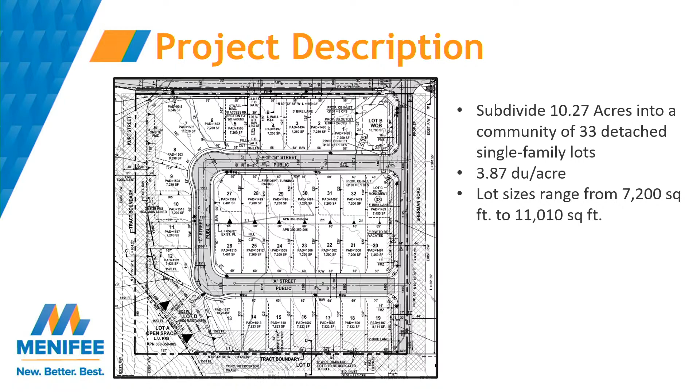The general plan for these two properties are 2.1 to 5 residential dwelling units per acre and rural residential 5-acre minimum. The rural residential zoned area is designated to the lower left-hand corner of the project site.

For the zoning, it is low density residential-2, which is a minimum 7,200 square foot lots, and rural residential 5-acre minimum. To the north, we have similarly zoned LDR2 zoned properties. To the west and south, we have a mixture of LDR2 and rural residential 5-acre minimum. And then to the east, we have EDC zone, economic development corridor.

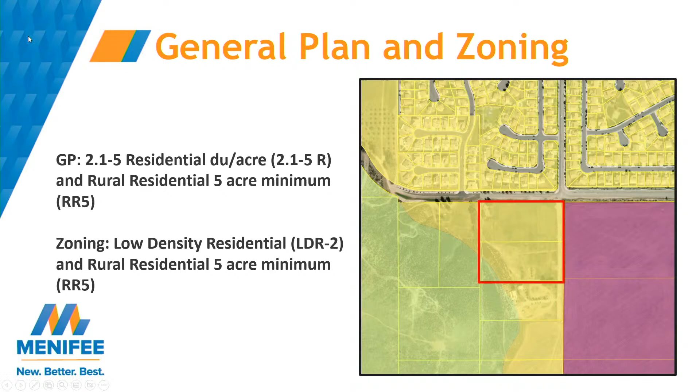Access to the site will be given from Sherman Road on the east side of the project. There'll be 2 entrances and exits for full access. And then due to fire and city requirements for secondary access, there will be an emergency only access corridor between lots 4 and 5 on the north side of the project for access to Garbani Road.

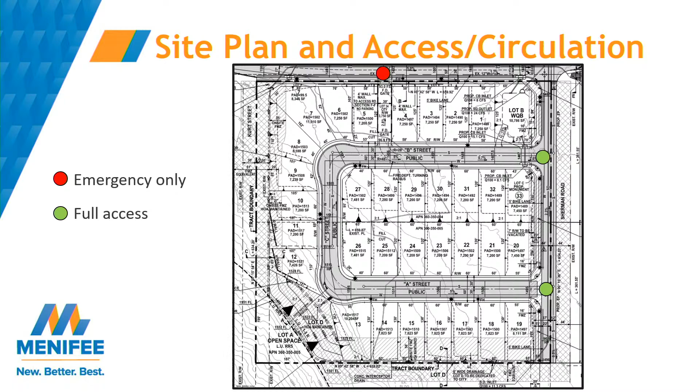The tract is within a high fire area, which requires a fuel modification report to be completed. This report dictated that the tract has to go through upgraded construction materials, restrictions on types of plant materials and locations on the properties, rear yard HOA maintained irrigation, and a block wall around the perimeter of the project. Total, there'll be over 90,000 square feet of landscaping.

An initial study mitigated negative declaration was prepared with a public review period from June 15th through July 5th, and no public comments have been received.

The recommendation is to adopt a resolution adopting the initial study and mitigated negative declaration and mitigation monitoring and reporting program, and adopt a resolution approving PLN 21-0361, tentative tract map number 37450, subject to the conditions of approval and findings in the staff reports and resolutions. And that concludes staff's presentation.

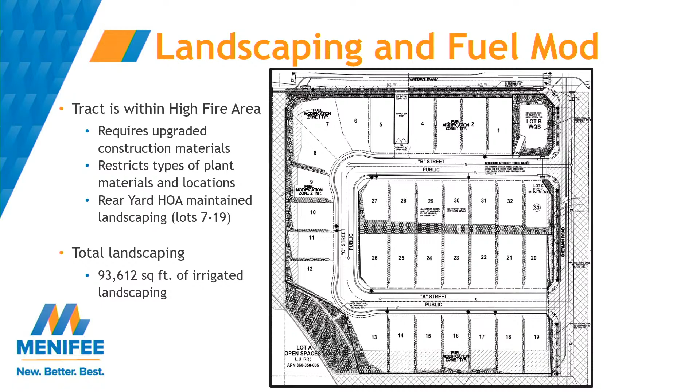Is this open space accessible to the public from outside as well as inside? It is not. It's mainly there to preserve the rural nature of that corner of the property and assist with fuel modification requirements. It's on a slope, so it will only have access to the homeowners association for maintenance. I believe it's going to be landscaped, right? A portion will be irrigated landscaping, and the lower left-hand corner will be natural open space. With two rows of shade trees, is that correct? There will be some trees in there, two rows, yes. Thank you.

Okay, we're going to open up the public hearing. It is 6:07. Madam Clerk, was this hearing legally noticed? Yes, it was. And was any correspondence received? The correspondence received was referenced in the presentation. I think the presentation said there wasn't any correspondence. Right, okay, thank you. Do we have the applicant here?

Yes. Can you join us at the podium and state your name, please? Hi, Jordan Birch on behalf of the applicant. Jordan. Let's see.

First things first, do you agree to all of the conditions of approval that you've discussed with staff? I do, and I'd also like to thank staff. I think they were great working on this project, and I just commend them. I think you guys have a great team here. I agree. Thank you for doing that. Thank you for saying that. Commissioners, do we have questions of the applicant?

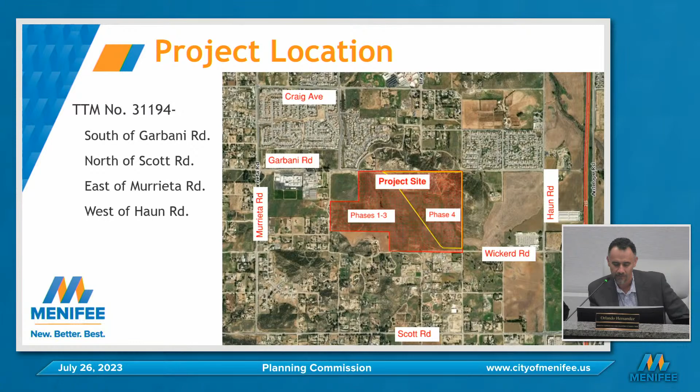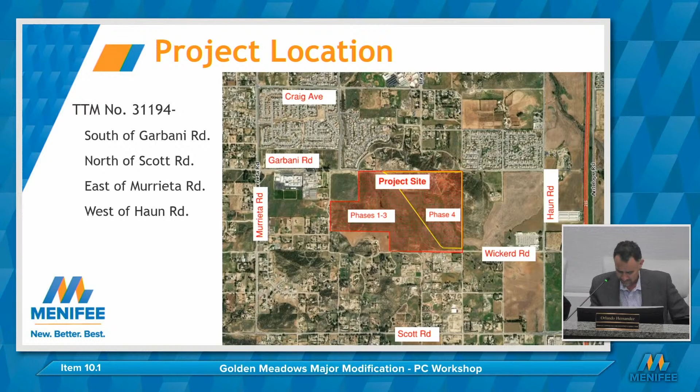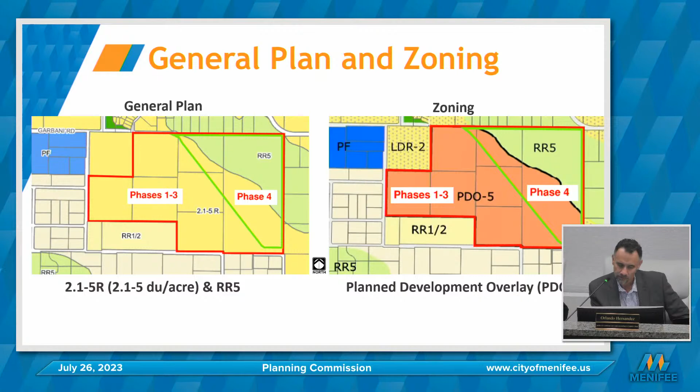Again, for the benefit of the residents and the people watching on YouTube who may not know the project, it's located south of Garbani, on the west side of Haun, east of Murrieta. You can see it's on Wickerd, north of Scott. The existing general plan designation is 2.1 to 5 units to the acre. There's a portion of the site, as you can see on the right, north side of the image—it's RR5, a rural designation, and that area is still proposed to remain open space.

So that hasn't changed. The footprint hasn't changed either. The zoning, as you see it here on the slide, it's PDO-5. That's a very unique type of zoning, and what this is, it was a density that the city did not have, and in order to apply a specific zoning for that development, the city created this specific zoning for it.

I do want to state for the record that the original project, when it went before the county, this area was zoned rural, with agricultural zoning, and it had a minimum designation of lot size of either 1 acre, 5 acre, or 10 acres, because it covers a big area. When that zone change took place at the county, it was zoned to more traditional single-family residential, but for us, we had to change it to comply with what we had in our general plan.

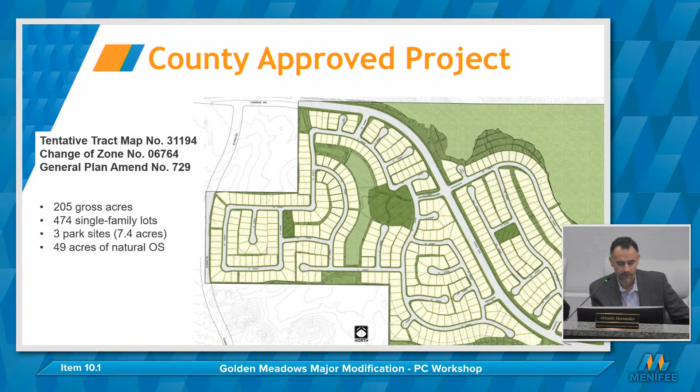So this is essentially what the county approved back in 2007. Again, 205 acres, total number of units, 474. There are 3 different park sites throughout the development that equal a little over 7 acres. And the open space acreage is 49 acres. It will remain the same as well.

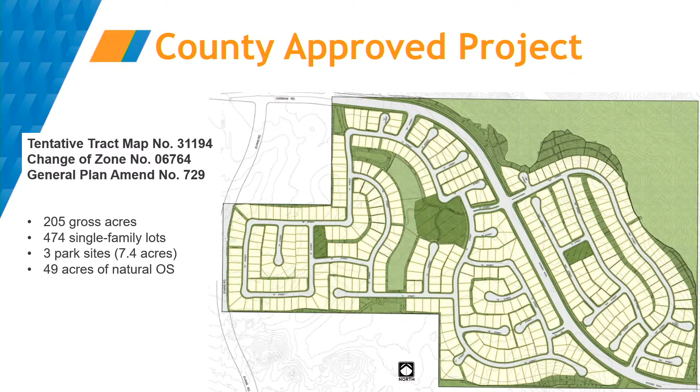As previously indicated, there are 4 phases to the project. Phase 1, 2, and 3 will continue to be the same. Phase 4, on the right side, is the project area right now, and that's the one that's been requested to be modified. As the project develops over time, different improvements will be required as part of those phases, and those improvements are listed as part of the conditions of approval.

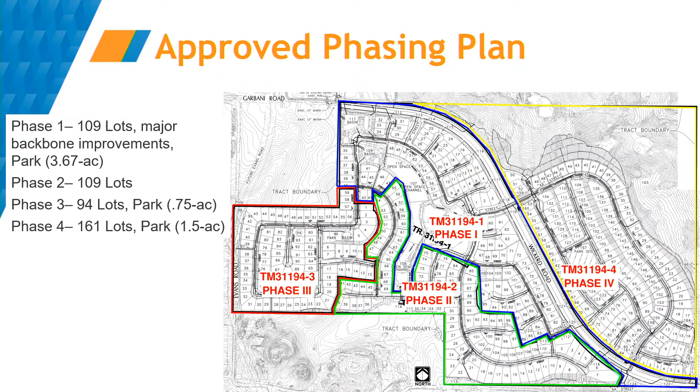The proposed project, this is a site plan that illustrates some of the changes. One, the park is being relocated more centrally to the overall project. Also, the lot size is requested to be reduced from what the county approved at a minimum of 6,000 to 3,780, which is the new minimum. There's also a request to decrease some of the setbacks to accommodate the smaller lot size.

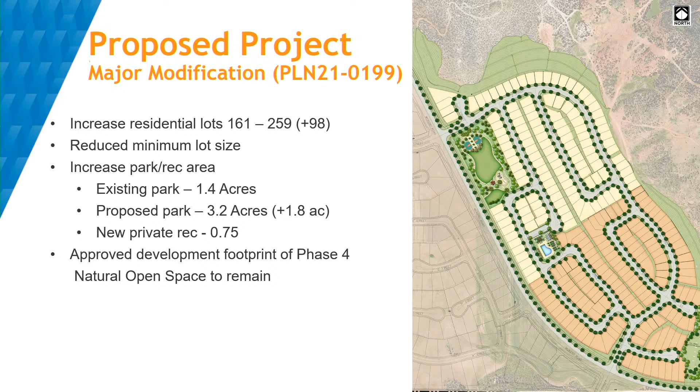The existing park that was originally approved was 1.4 acres. The park currently proposed with the amended project is 3.2 acres, an additional 1.8 acres. It's also proposing a private rec area specific to phase 4 residents only, with a rec building, a pool, and other amenities. The footprint of this area remains the same as previously presented to the commission and as approved by the county.

Again, just to reiterate, the county approved a 6,000 minimum lot size, and what's currently proposed is 3,780 on the revised map.

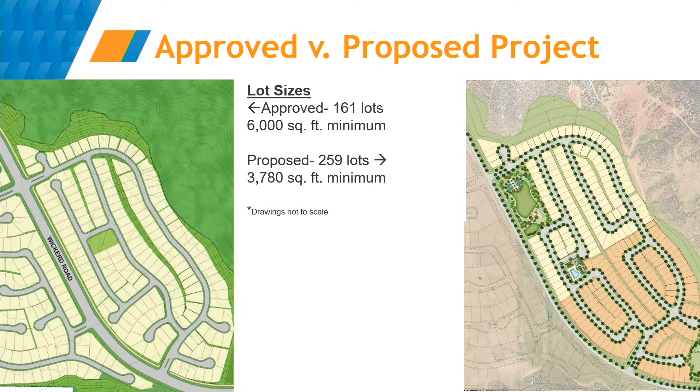I want to highlight a couple of additional items that the applicant has proposed. One of them you've already seen as part of the project presented before the Planning Commission, which is the bigger park and rec center that was part of the original modification. The other items have been added to the project either before it went to City Council or even after, in an effort to provide additional community benefits.

The first bullet is a half-mile trail loop being proposed in phases 1 to 3. There's an existing area that would accommodate this loop, and the applicant will further explain with a more detailed presentation on these changes. I wanted to make sure the commission knows this is something new. The third bullet point is they added an equestrian rest area with a hitching post at the park that was not originally contemplated. They're also adding additional language in the CC&Rs to state that this is a rural character neighborhood and that the trail will be utilized by horses, so new residents know the nature of the area.

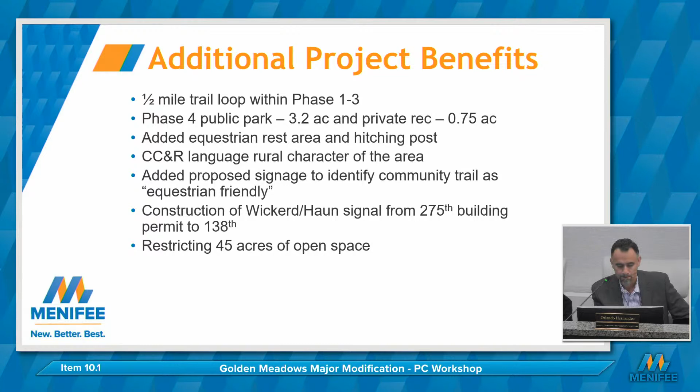Additional signage as well around the park and around the neighborhood. One other benefit is that the applicant, per a mitigation requirement, must provide a traffic signal on Wickerd and Haun. The original traffic study mandates that be done at the 275th building permit. Since there's a need to have this improvement done sooner rather than later, the applicant is proposing to get it done at the 138th permit, and also put in a restriction that no development will occur in the open space, the 45 acres of open space.

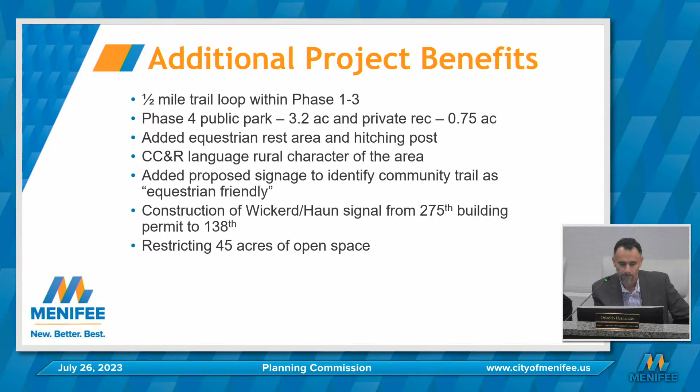Okay, so obviously the item was remanded back by the city council. What does that mean? It means the applicant needs to provide either various options for the planning commission to consider, or at minimum revise the project. The planning commission will have the ability to consider those revisions and provide a recommendation to the city council, based on whether you agree those revisions mitigate the four areas of concern I highlighted in my presentation. Then it goes back to city council on your recommendation for approval or denial.

So today the applicant has a presentation they're going to make to the commission. We haven't seen any revisions at this point, so I think the applicant wants to get feedback from the commission and see what items they would need to further analyze or modify, and that'll be part of the discussion tonight.

So again, same thing, just looking for feedback from the planning commission. At this point, the chair and the commission can either ask questions of staff, or if the commission wants, we can have the full presentation by the applicant, and then follow up with questions after that. It's up to the commission how you want us to proceed.

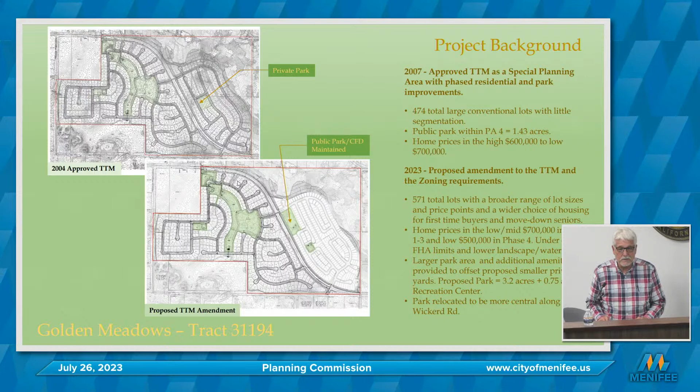I attended the Planning Commission hearing. I listened, I did not speak. To introduce myself, I'm the planning consultant working on behalf of this project with Richland. I'm here to provide the first half of our presentation, and then Brian, who is with Richland, is going to give the second half. We also brought our traffic engineer to help answer the hard questions that we don't know about.

So as I said, I'm a planner. As Orlando explained, we submitted this application in May of 2021 with the staff. We've worked on it for quite a long period of time before we brought it to Planning Commission. When we brought it to Planning Commission, we had staff supporting the project, identifying no general plan amendment. The staff report included that there were no additional impacts created by the additional lots we requested. And the staff told my client that we didn't need to present the project.

I've been doing this a long time. Only five people showed up to oppose the project, and I thought it looked pretty good. I should have known better. As you know, we left with a 0-5 denial.

So tonight I'm here to say what I think should have been presented to you for better consideration. That's item one. Item two is I'm going to identify the things we've done after we got the 0-5 denial to try to work towards a project approval, and the things we've learned from talking to the planning commissioners and city council members we've had the opportunity to speak to. But most importantly, we're here to listen and hear what you guys have to say, because we weren't expecting a 0-5 denial, and we'd like to show, when we come back, our best attempt to try to change your mind.

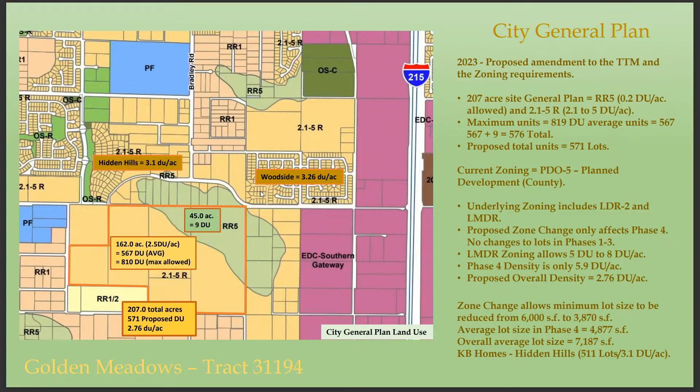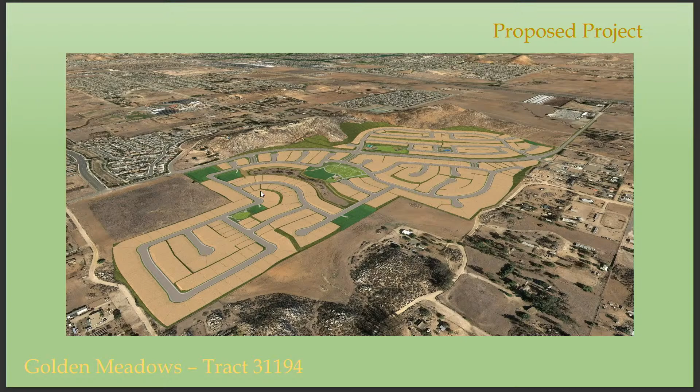You can see coming kind of serpentine through the site is Wickerd Road, and on the far left you can see where it kind of ends at Evans Road and connects off the picture to the left to the middle school.

Looking back the other way, in a northerly northwest direction, you can kind of see basically the entire city of Menifee. You can see the encroaching development from the Kaufman and Broad project and the Woodside project to the north, which basically touch our northeast and northwest property boundary. You can see how our project transitions to the lower density uses in the foreground, and how it provides a major connection through the site.

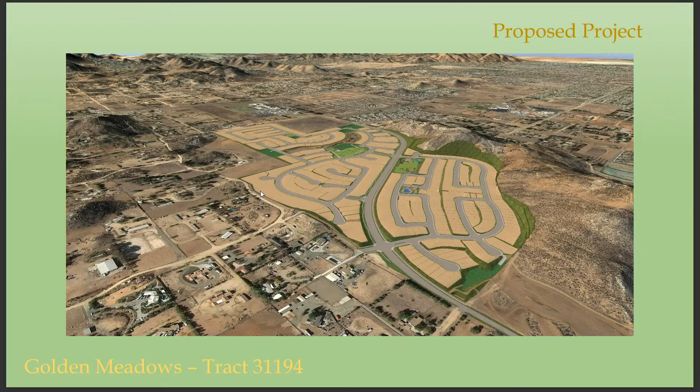We chose planning area 4, not just because it was phase 4, to use this density play to get the additional units, but also because when you look at the site plan, it's got undisturbed natural open space proposed by the project. That's actually zoned for 9 units.

Our proposal, to just clarify another thing that Orlando said, we're not proposing to dedicate 45 acres of open space. We're proposing to deed restrict that zoning, which has the entitlement for 9 units, to not allow those units, and only to allow public improvements such as the water tank, which will go in there.

I don't know how to express this, but everybody benefits from a successful project. If we have a project that staggers and lingers and is developed over 8 years, that only delays all the improvements. 138 comes up a lot further down the path than it would if we have a successful project that's well received in the marketplace.

The project itself provides 1.7 miles of community trails and meandering sidewalks. It provides about 0.8 of a mile of full traffic improvements, the first really paved roads in this area of town.

We're increasing the size of the park. We're also increasing the accessibility to the park. We've increased some of the amenities in the park. By enlarging the park, we have the ability to provide practice soccer fields for the youth, which we've heard in the community is an important thing.

Just comparing the park, you can see what's been added. We still have the tot lot. We've added to the tot lot a shade covering because of climate change. We've enlarged the grass area. One thing I'd like to point out is on the far left area of the park, you can see a little oval-shaped area. That was added to the park after we worked with staff on getting these amenity packages approved. That is a connection to the equestrian trail that runs along the north side of Wickerd into our site, with a hitching post, watering station, and rest station for a horse stop.

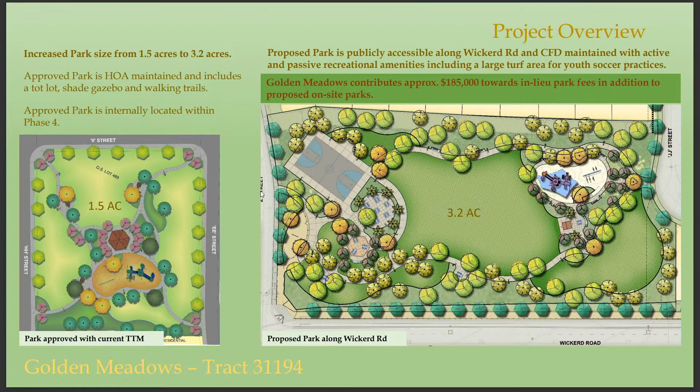In addition to increasing the park size and all the amenities, we are also paying $185,000 into the in-lieu park fees, the Quimby fees.

The first issue that came up at the Planning Commission from the public standpoint, and was reiterated by the council, was this is a rural area. This is a land use compatibility issue.

I have to go on record as saying this project was approved by the county. I didn't know until I met the 5 people entering this room what a big issue that was, and I know they hate the project. I don't expect that they like me enough to change their mind. They're going to hate the project until they love the project, and that's not going to be tonight. I know that. I've worked with them. I've tried to be as transparent and open with trying to find solutions with them. But...

The project that was approved by another party through the county, that we bought and the city inherited, and has had to do special zoning to get to work, is a project that we understand nobody's going to like. Nobody's going to feel like they won at the end of this process. But we can try to listen to other people and try to basically be good neighbors and do the right thing. And that's what we've tried to do.

A couple of things I want to clarify: we're trying to provide housing that my client likes to use this analogy. I don't, but if a planner in the city of Menifee is married to a teacher in the city of Menifee, they can afford to live in this community now. Wish it was an engineer and a teacher, but that's the analogy we have, and that's the idea behind this community - that we can provide a place where you can live, and this is important to me, in your house on an 8,000 square foot lot, and your grandkids could live in the same community across the street.

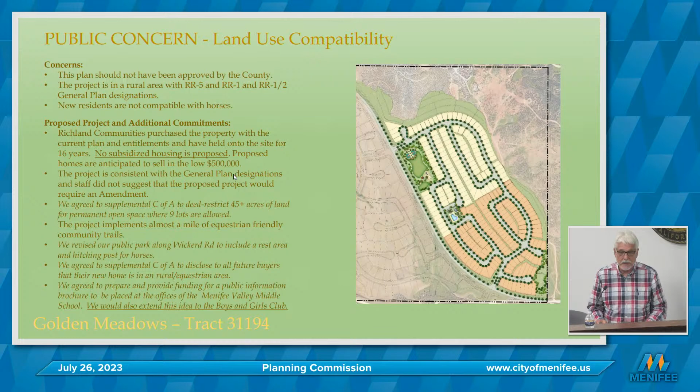So we've agreed to deed restrict the open space for land use compatibility. We're consistent with the general plan. We've revised the public park to be more compatible, and we've made some other agreements that are in negotiations and early stages of trying to help with local traffic improvements and educate the public. All buyers will be disclosed that they're moving into a rural/equestrian neighborhood, and they should know what to expect in terms of odors, smells, noise, dust, whatever. And that is important because that follows the deed and stays on the land.

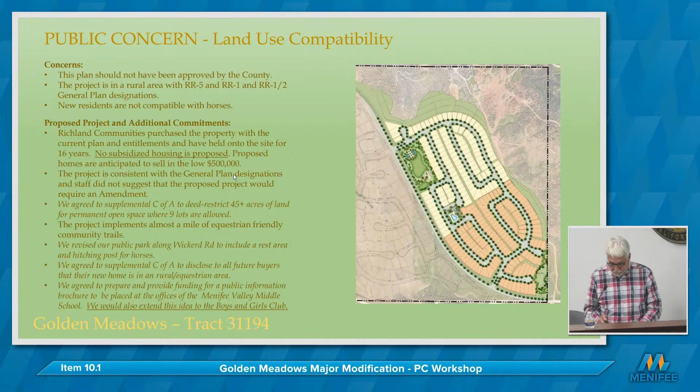In terms of land use compatibility, like I said, we're consistent with the general plan. We're well within the allowable density. The nature of our zone change is really a text change. In terms of physical compatibility, this is the section I told you through that little X house - we're 116 feet below that, we're over 1/8 of a mile, we're 690 feet away from the closest house to our closest house. The zoning has a built-in, and the topography has a built-in compatibility to it. In all of our change, we're not changing the development area at all, just the number of units, and you are 116 feet above.

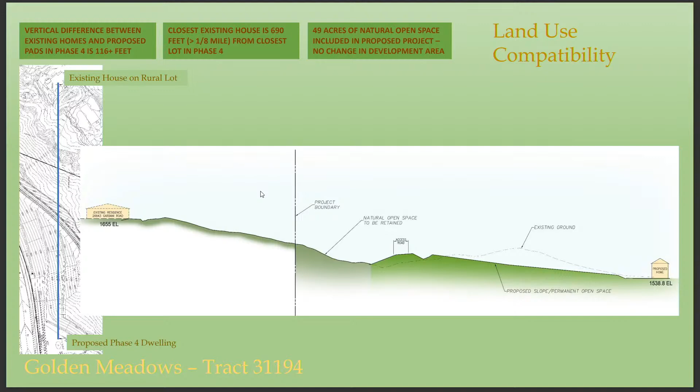The other concern we heard about, and Orlando brought it up on his Big Four, was traffic impacts. This was addressed as their number one concern, not land use compatibility - the traffic impacts. Specifically, the traffic impacts at Evans and Garbani during school drop-off and school pickup. Yours truly went there and witnessed it, and then drove on Garbani, which seems to be the shortcut of choice, up that dirt hill and back down that dirt hill. And that's got the neighbors upset. I don't blame them, it would get me upset.

We spent maybe more time than we should have trying to resolve that issue, but we want to show the commitment that we want to try to find an acceptable solution for the city and the neighbors and us to close off that road to cut-through traffic. That's a work in progress, but we're committed to doing that. We just had a meeting a few days ago with Nick where he proposed something that the city could support, and we're going to continue those studies until we come back to you. Maybe we'll have something better to report, but we're committed as long as we're vested in this project to do that.

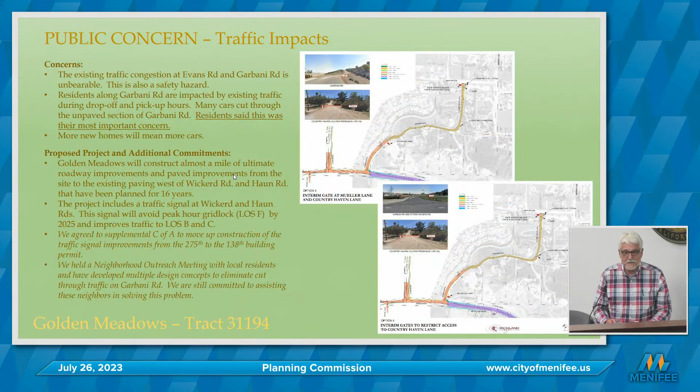There's been a lot of discussion about safety and turnarounds, and I know human behavior. Once you put a gate or a roadblock some way that people can't get through there, they're only going to try that once, and they're not going to do it every time to see if by chance the gate's open. It's a behavioral adjustment.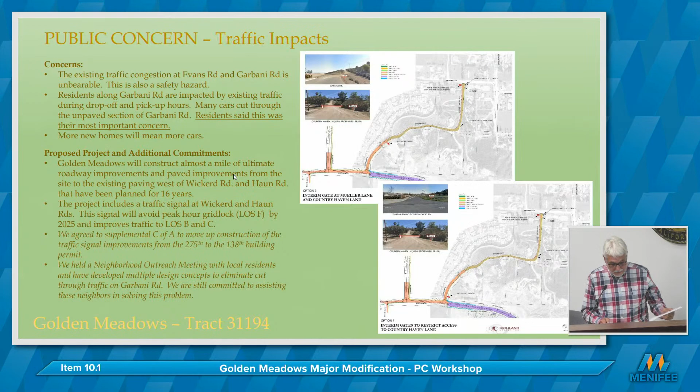So in terms of traffic benefits, and I believe this is my last slide, and then I'm going to turn this over to Brian. We're providing a quarter mile of paved improvements, that light blue section, to connect to the existing paving just west of Wickerd and Haun. We're extending that paved section. We're not doing the full right-of-way improvements that will be done when the adjacent land parcels develop, but we're providing that physical paved connection.

We're providing 100% full right-of-way improvements and trails and meandering sidewalks on both sides of the purple section, all the on-site improvements that connect up to the existing paved road at Garbani. There's a little short section of Wickerd called Garbani before Garbani makes a hard turn and becomes the dirt road to the north. So we're making all of those traffic improvements.

We're also funding 16 other fair share improvements. That's not a big number, it's only $217,000 in fair share improvements, because our project doesn't actually impact a lot of other traffic signals.

We're paying $6.5 million in school fees. The Wickerd improvements on site are—it's a weird thing trying to remember numbers for the project—just about everything we do costs about $6 million. So the tank is $6 million, Wickerd Road is $6 million, the school fees are $6 million. So whatever you want to do tonight, just don't add $6 million to the cost of the project.

So anyway, with that poor joke, I'm going to introduce Brian. He's the applicant on the project, and like I said, at the end we're available to answer any questions, including traffic-related questions. We brought our traffic engineer.

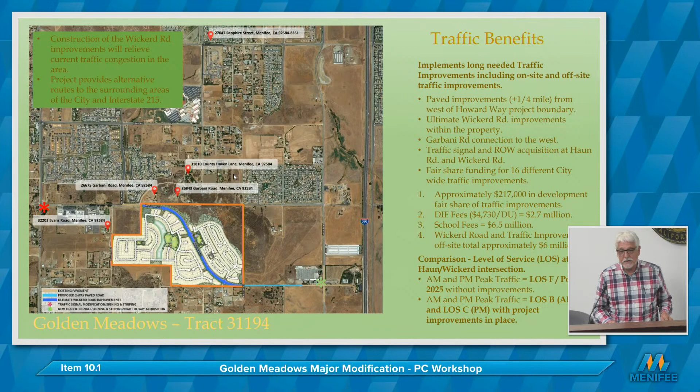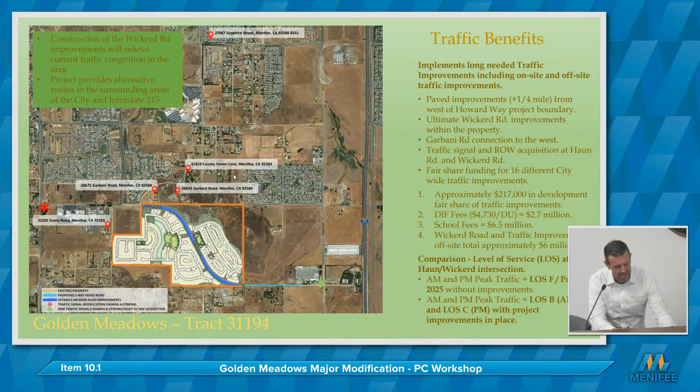Thank you, and I'm Brian Hardy with Richland Communities. Good to see everyone again this evening, and thanks to staff and everyone for putting up with all of our multiple hearings and meetings and a year and a half of efforts on this project. At any rate, I'm going to take it from here and try to keep it brief.

The one thing I want to clarify on Terry's portion is that the zone text amendment we are doing only applies to phase 4. It's not across the board for the entire project, it's limited only to phase 4. That was purposeful because our intent is to keep all the larger lots, the 370-plus large lots, over on the other side of Wickerd, and to have a nice mix of product type.

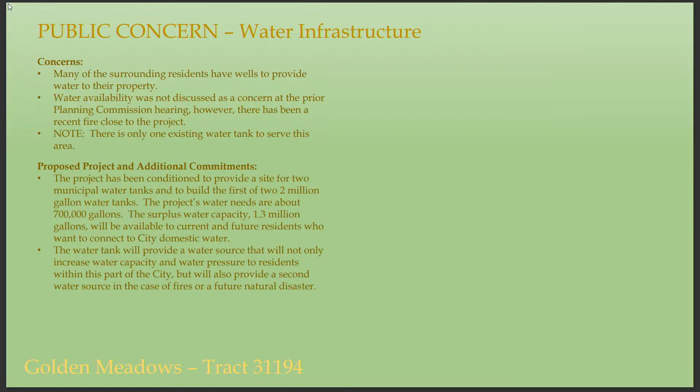So, water infrastructure and concerns. When I started working on this project, we had a plan of service in place that did not require a tank. We have an 18-inch line that goes into Wickerd Road, a major infrastructure piece, a major water line into Wickerd, and that still exists today. About 4 years ago, we were seriously trying to move this project forward, with the market being in a better position.

As we worked with EMWD, we have a POS, a plan of service, which is how you service your site from a major water infrastructure standpoint. As we went through that process, we quickly found out that just doing that 18-inch line is no longer feasible — there are pressure issues, capacity issues. Really the main issue is that there's only one tank that serves that entire pressure zone, about a mile away. If there are ever any issues with that tank, there's no redundancy to it.

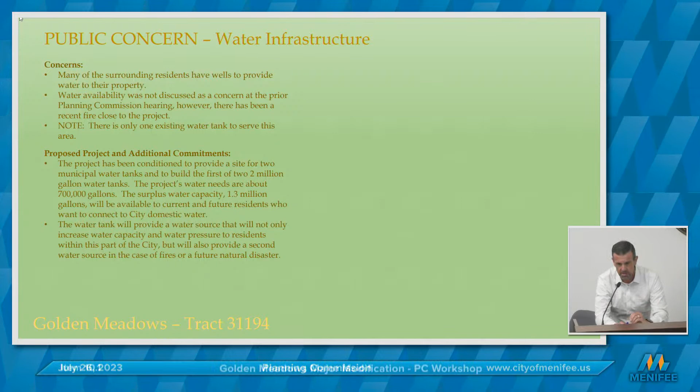So our project proposes a 2-pad site for 2 tanks. Our project needs about 700,000 gallons of the tank. We're building a 2 million gallon tank, plus a pad for a future 2 million gallon tank. That's about a $6.5 million price tag. There's some cost sharing with the EMWD that we're working through, but the way that works is we get the minority of the tank and pay for the majority of it. Right now, if I had to guess, we're looking at paying for 56% of that tank, about $3.5 million of additional costs to the project.

Even though they're sharing a portion of that, we still have to cash flow it and fund the construction, and then they pay for their minority portion once it's done and they accept it. So there's a cash flow issue with sourcing the funds for that $6 million, and that tank gets built prior to occupying anything in phase 2.

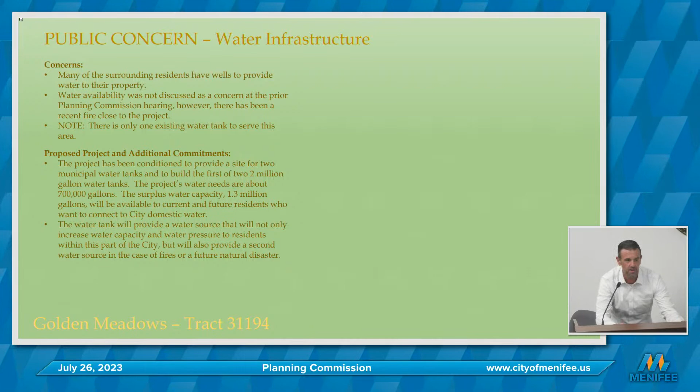So they're acquiring the land from us, and they're paying for that. We just agreed on an appraisal — they're paying $120,000 for the land the tank will be on. So it's a good deal for them.

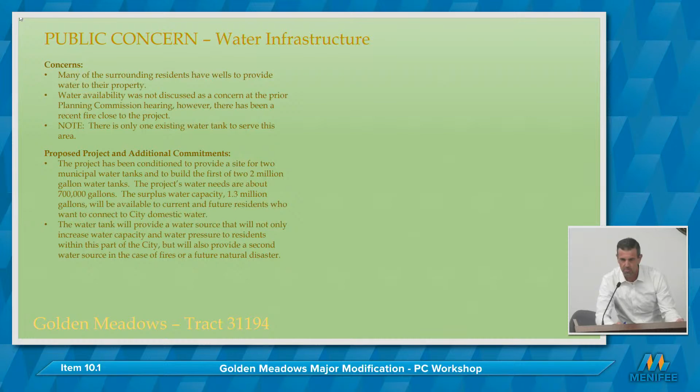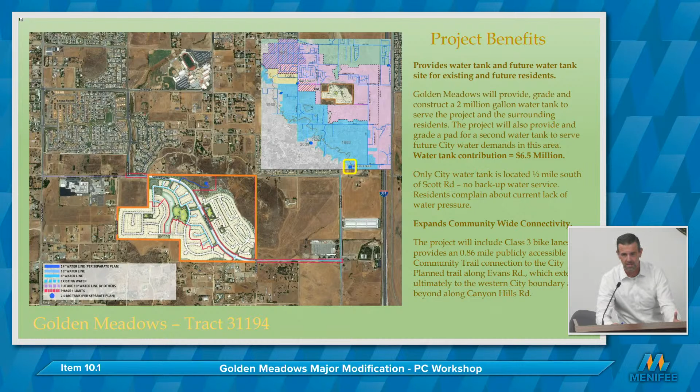That tank serves the pressure zone we're in, which is a very large pressure zone that also reaches into the enterprise zone, closer to the freeway. The capacity there will feed all other future development in that zone, including the enterprise zone — meaning the EDC between the freeway and this project. So that's a major piece of infrastructure for future commercial developments in the area, and one of the more critical pieces with public benefit, since that tank will allow future capacity. Any enterprise or commercial project that went in there isn't going to fund a tank like we are — they'll wait until somebody else does it.

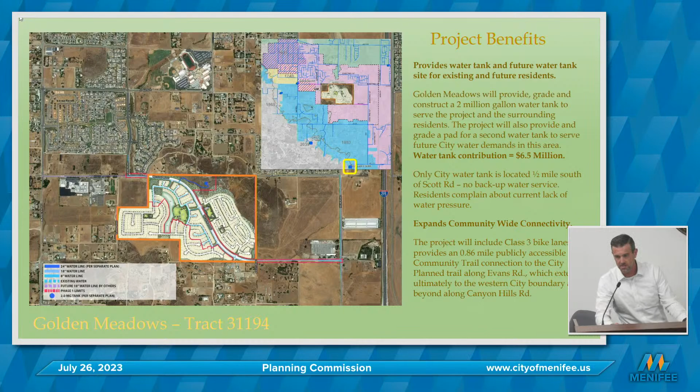You can kind of see in that little yellow square, that's where the other tank is that exists today that serves the pressure zone that we're in.

Just some other benefits Terry alluded to. In addition to all the parks we're building here, we tend to get honed in on phase 4, but in reality it's a greater project as a whole. So you can see the overall network of parks we're building. We've got the main park located in phase 1, and it gets constructed with phase 2. That's actually the larger park, and has all sorts of amenities in there as well.

It's HOA maintained, but publicly available. So it's a public park that would be maintained by the homeowners association. And then the other park that we've expanded is public. That one is a public park.

And then you can kind of see that little green loop. That's where we talked about adding the half-mile running loop and some exercise stations. That's kind of something we were doing to offset some of the additional units as well. So we've added that. And in between that, there's a drainage course out there that exists today. We avoid that, and it stays in place as open space. So that's kind of a natural amenity. And the running track goes around it, and then you've got a series of areas to work out along that half-mile loop.

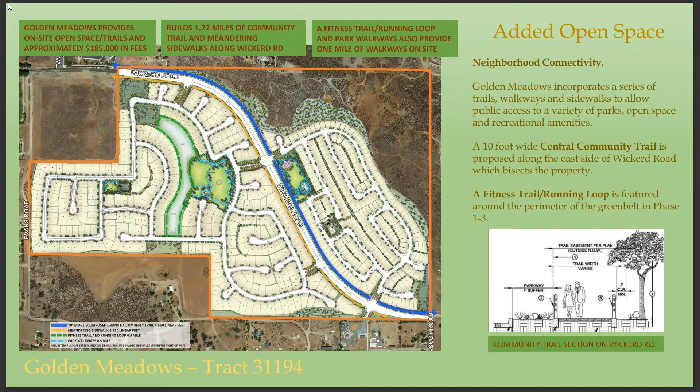I'm going to bring up our traffic engineer. In fact, there's another exhibit, Orlando, that we sent that kind of shows some routes. But just to close while we're doing that, we've had a lot of things transpire since we've been here. We've had a lot of meetings with the public and phone calls, and we've had meetings with everyone that'll meet with us and staff.

Generally, we've kind of been cataloging everything that we've promised to do since the last hearing and what we've been going through. So we've been proposing about 10 conditions that go over and above with phase 4, to kind of make sure that we walk the walk and do what we say we're going to do.

We've got a lot of land in Menifee. This isn't our only project. This is one of our middle projects. We have a larger project over on the other side of the freeway, and then a smaller one up in the northern part of the city.

But generally what those conditions say, and we can go into more detail on them, but I'll summarize them before we turn it over to Charlene. Generally, it's to continue to work with the public and the neighbors to try and come up with a solution to close Garbani off. And we've looked at if there's nothing that comes out as a solution, the backup condition would be that we would put that in our public maintenance CFD and fund the city additional funds to maintain that road until it does get paved, as a backup.

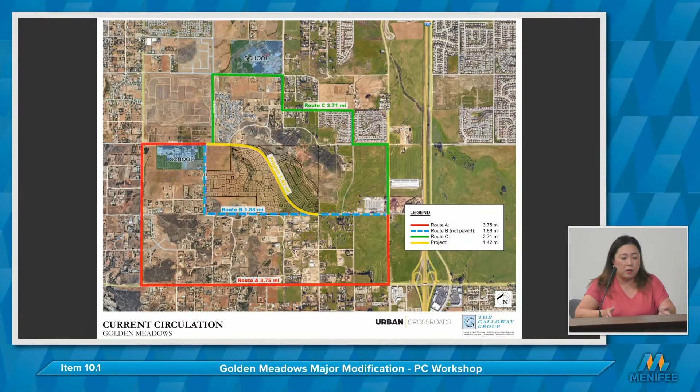Hi, Charlene So with Urban Crossroads, the traffic consultant on the project. We wanted to bring up this slide and highlight, from a circulation perspective, the benefit that this project brings. The Golden Meadows project, like Brian and Terry identified, is going to complete this portion of Wickerd, which is an identified roadway on the city's general plan circulation element. So for the portion of the roadway that lies within the project boundary, they would be completing the ultimate roadway section and then would provide a paved section the rest of the way over to Haun.

This new east-west roadway connection is shorter. It measures approximately 1.4 miles from Evans over to Haun. Currently, to get to the same points from Evans over to Haun at Wickerd, we've drawn out these other alternative routes that exist today. Route A basically goes west to Murrieta, down to Scott, and then up Haun. That's the longest route at roughly 3.7 miles.

Route B uses an unpaved roadway route, but it's a little bit shorter at 1.8 miles. And then there's Route C, which uses paved roadways to the north to come back south to Haun and Wickerd, and that route is about 2.7 miles. So you can see that the completion of this east-west roadway would significantly shorten the distance and the time to get from Evans over to Haun along Wickerd.

Providing this east-west connection would not only improve access for emergency vehicles in the area, but as Terry and Brian alluded to earlier, could potentially alleviate some of the cut-through traffic that's occurring in some of the surrounding neighborhoods. I'm available if you guys have any other transportation-related questions.

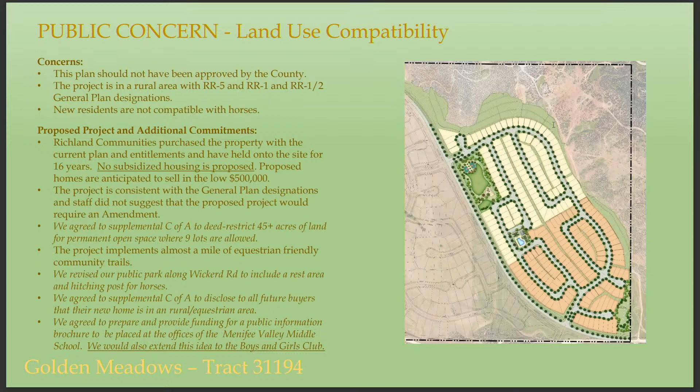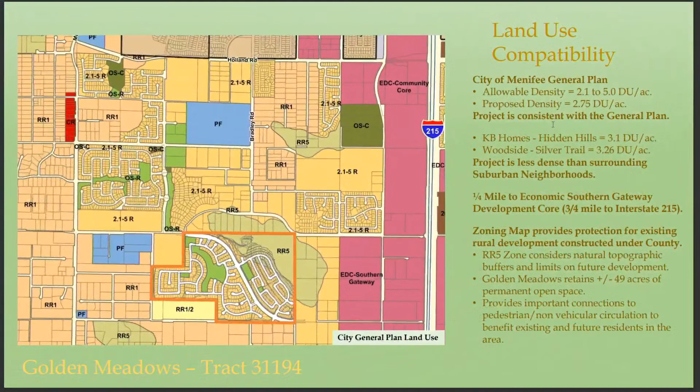So the orange ones are the smaller ones, and the yellow ones are the 4,000 plus. I didn't want to say larger ones because somebody would say that's probably not correct, but it's 4,000s and 3,780s. I think we actually have a better slide that shows that one even closer up. But again, I don't know if I'm doing this or somebody else is.

I think I'm going backwards. Okay. At my age, this is the big nightmare, that you get to the meeting and... right there. Oh, you just passed it. There we go, right there, yes. There, this is the best slide to show it.

So the lighter colored lots that are around the park and closer to the rural residential 5-acre, RR5 zone, we've put them on the north end of the site and buffered them with the natural open space, which we've agreed to further deed restrict if we get this approved. And then to the south, closer to the Haun-Wickerd intersection, is where we're proposing the smaller lots, 3,780.

I know that's a weird number and it sounds really small, like a 32 waist on your Levi jeans, but really what that is, is a 42-foot wide lot. It's actually deeper than the larger lots, but it's 42-foot wide. What makes that number significant is if you have a 42-foot wide lot and put a house on it with a 16-foot wide driveway, typical for a 2-car garage, everyone can park their car in front of their house. There's room between the driveways at 42 feet - that's the magic number architecturally.

So we didn't want to go to smaller lots than that because we know people park in front of their houses, and that helps sales, especially with the senior buyer. That's one of the potentials in terms of the demographics we're trying to serve. I use the planner, teacher, younger people scenario, but also this is a great place for people who don't have to commute downtown, who like to live in a lower intensity environment, to have a retirement home. That's one of the reasons the pool is implemented.

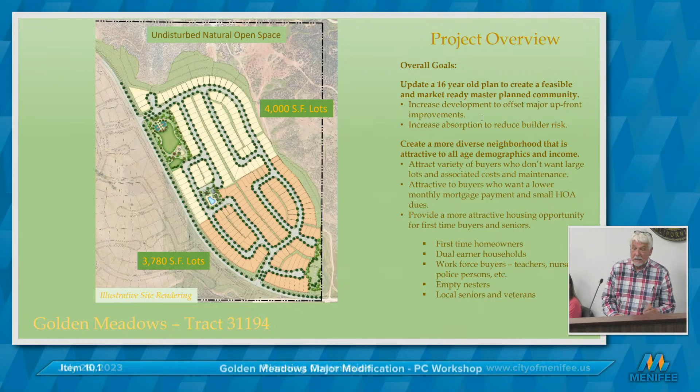The reason why we reduce the front setback is architecturally, if you have a house on a 42-foot wide lot or a 45-foot wide lot, that house is going to be 32 to 35 feet wide. The garage door remains the same on every house at 16 feet wide, so a larger percentage of the front elevation is garage dominated on these smaller lots.

Nobody buys a house because of a pretty garage door, so by keeping the 20-foot setback to the garage but reducing in phase 4 the living space setback, we can bring the living space forward of the garage, which visually reduces the impact of the garage as you drive down the street because there's living space in front of it. So all of the setbacks are really a side effect of designing the house and putting the lot around it, trying to be as efficient as possible so we can reach that $500,000 buyer profile.

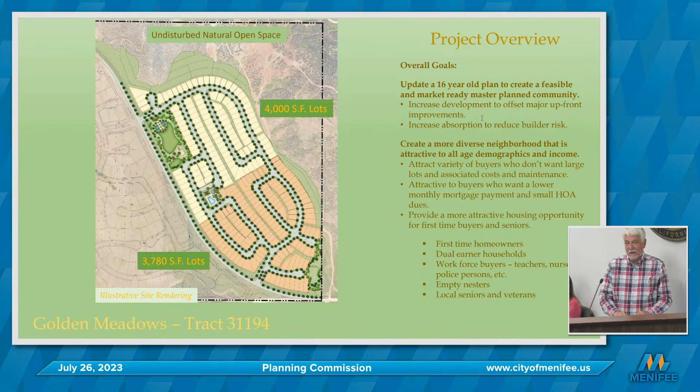I'm out of breath. That was a traffic question. It's a point of my concern.

So for the bottom half of the project with a lower lot size, I'm just guessing then street parking would be higher than the upper portion. So how do you take care of the parking situation for the lower half?

So no, what I just explained is by having the smallest lot width be 42 feet, that means we can effectively park 2 cars in the garage. I know nobody does that, so let's not give 100% credence to 2 cars in the garage, but we got 2 car spaces in the 20-foot driveway, and then every house in the remaining frontage, the 42 feet minus the 16 feet, allows 20 plus feet so they can park a car.

When you expand that from 42 feet to 50 feet, that just gives you 8 more feet to park a car, it doesn't give space to park 2 cars. So essentially the parking availability in theory in both neighborhoods is the same, and it equates to about 5 parking spaces per unit, counting the 2-car garage, the 2-car driveway, and the space on the street in front of it.

And then there are other situations site-planning wise where you're on the side corner and there's no driveways, and you've got 90-foot lots back to back, 180 feet of parking, which is about another 9 parking spaces. So in my head, I probably did the math wrong. Thank you.

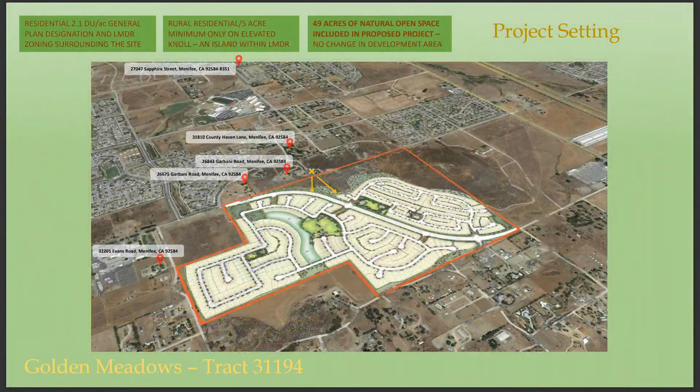The third one would be, I have a large concern on the sidewalk at the northern area. Can we go to the graphic you just pulled up? Let's go to the one that shows the Garbani school site and the sidewalks.

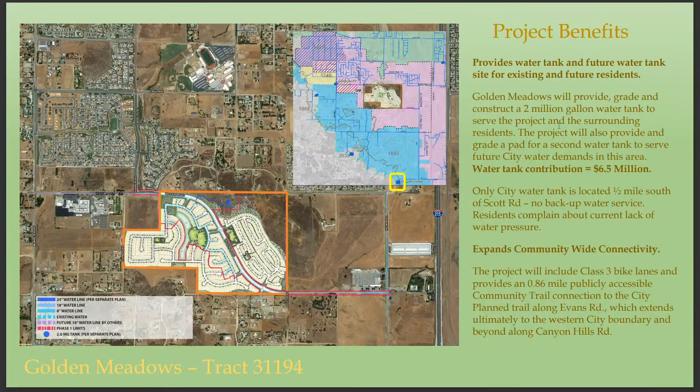I'm not sure whose presentation this was in. A little farther, a couple more, right there, back up, back up. You know what I'm doing—lighter, pushing finger backwards on the same button. IT's fighting you. No, right there, next one, back one. You're doing the same thing, trying to go back. No, that's a different button, other way. It's not intuitive. You're getting close, exactly, we're almost there. One more, stop, stop, stop, stop.

So in reviewing this with staff and with the developer, the big concern is once all these houses go in, a bunch of kids are going to be walking to this middle school. They could technically cross Wickerd—there's a sidewalk on the northern side of Garbani Wickerd, and you'd put it along the north side, then they'd cross. That's not as tenable. I'd like to keep everyone on the southern side of Wickerd Garbani, because that's what the kids are going to do whether you put it there or not. I used to walk to school, so I know what I did.

And have a continuous sidewalk or AC pavement on the southern side of Garbani and Wickerd all the way to the middle school. Now my technical question for city staff: I was told there's a little drainage thing in the corner where the yellow arrow ends, and they don't own it—but where does the right-of-way stand? Don't we have a 20-foot right-of-way after the center line there that we could put an AC paved sidewalk, regardless of ownership?

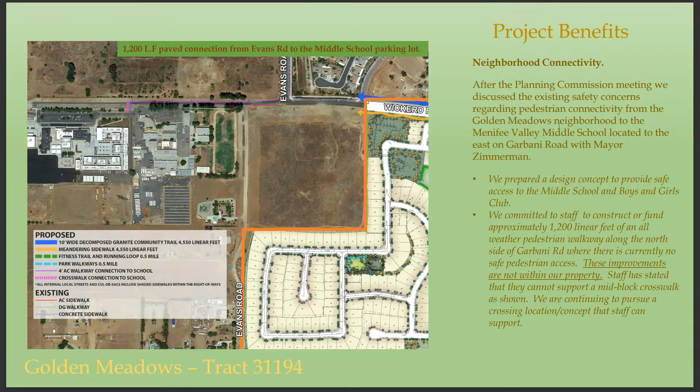I think it actually shows better on this slide—you can see where our meandering sidewalk ends. And you can see there's a temporary taper because only half of Garbani, shown in brown, is built. The south half hasn't been built because that vacant piece of property where the Garbani Road label is—you can kind of see it on the left side. So improving that frontage on the Garbani section to the west of your property—no, right, we don't own that. You don't own it, okay.

Nick, Orlando—is there enough right-of-way off the current center line to put a paved sidewalk to keep the kids on the southern side? Vice Chair Thomas, unfortunately our GIS isn't bringing up our right-of-way documentation, but I 100% agree with your analysis of having the students on the south side of the roadway.

Adding another mid-block crosswalk in front of the school is going to be very challenging. It's already a stream of kids at the intersection of Evans and Garbani.

So Nick, I'm glad we have a chance to work this out, because our engineer is proposing on the north side of the street 1,200 linear feet of temporary asphalt sidewalk, and that ends and requires a mid-block crosswalk, which staff doesn't like, and we fully understand that. We don't really like it either, but if you don't have the connection to the sidewalk, kids are going to run across the street there, so we need the sidewalk to make that work. If we can replace 1,200 linear feet of asphalt with 500 linear feet on the south side, we'd certainly be willing to do that.

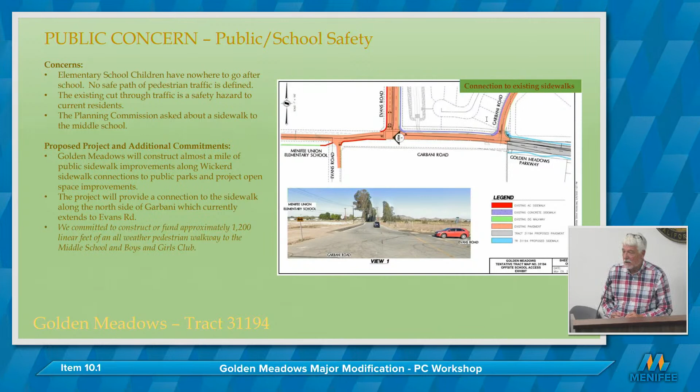Our engineer has told us there are some technical issues why we can't. Cheryl and I spoke this morning, and she said they have some engineering input that shows they can do it. We've got some time before we're scheduled to come back to you, and that will be something we'll work on. We're committed to do one or the other, and we understand the difficulty with the north option. If it's easier to do the south, I think we're all in agreement that's the better solution. So if staff would study the right-of-way there, I'd strongly encourage making that work.

Obviously, if there's engineering things we can't, but if we could, that would be my suggestion. Then work with past staff, as far as the whole Country Haven and blocking it off for a while, what is the law as far as it's a public roadway and blocking it off for a temporary period? Can you do an emergency ordinance or variance or something?

So Country Haven has been dedicated, but it has not been accepted by the city. So it's not truly a public road at this point. It's been dedicated. I've worked with a couple of the homeowners or property owners in that area.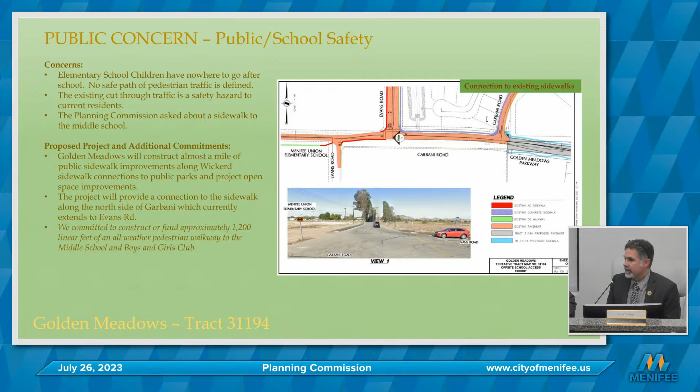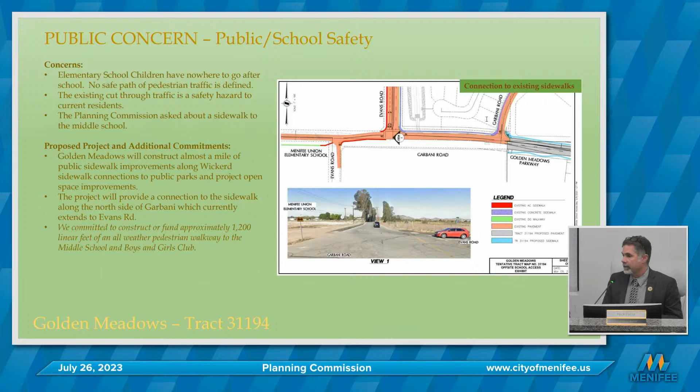It would require the homeowners in that area to produce a petition saying that they would be open to closing that section of roadway. Not only the people that front Country Haven, but the adjacent parcels that would use it on a route. But that could be overcome by putting in some sort of electronic gates or devices that those adjacent property owners have access to as well and can use. So it would limit it to a finite amount of property owners.

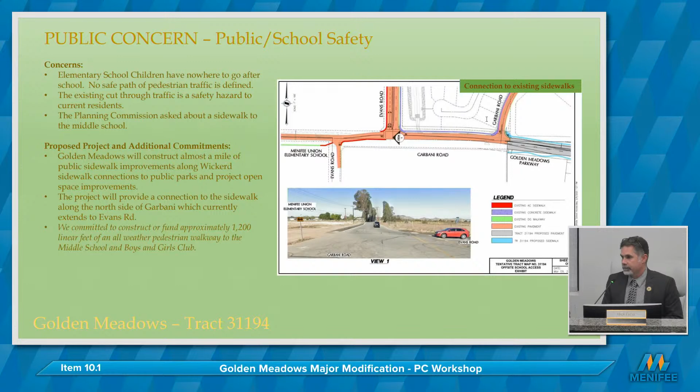So if it's been dedicated, but the city has not accepted it, legally it's still the property owners'? It's very much like a private road, a private roadway in an HOA community. So they have the legal power to do this then? Yeah, property owners. We could work with them, but we would want to make sure that everybody's in agreement with the closure.

Because certain residents that are just adjacent to it have used this route for several years, we want to make sure that they still have the ability to enjoy using that route. There will be some requirements to make sure that there's proper access for safety, fire, a Knox box or some squawk box thing? Yeah. There's adequate turnaround ability.

If someone were to come down the street and find out they can't continue, they'll be able to do a U-turn similar to a cul-de-sac or a hammerhead, preferably like a cul-de-sac that would be easy for someone to maneuver outside of those gated areas. So if someone's coming in from Garbani from the south, there would have to be a little area for them to turn around and head back out without having to back down the whole road. Same thing on Mueller, there would have to be a little area that they could turn around and head back out.

He had mentioned that they agreed to, whether it's a CFD or a temporary mechanism or just a direct bill, whatever it is, that would fund those temporary fixtures. Is that correct? So the way the condition kind of reads right now is the assumption would be if we can't come to a full design on this when we come forward to council or planning commission, if there's nothing that is ultimately supported and agreed upon by the neighbors, the fallback would be to fund the maintenance of the dirt road until the road paves through the project maintenance CFD.

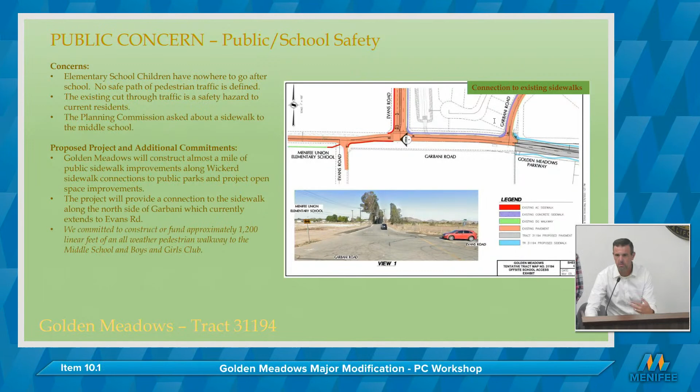Unfortunately, that wouldn't be feasible if the road hasn't been accepted by the city. Well, we're talking about Garbani. Oh, Garbani, not Country Haven. Yeah, I'm talking, okay. That's a backup if we aren't able to work something out. We'll let staff work out the dirty details on this.

But the goal here is to be able to temporarily block off to mitigate the residents' concerns about that route being used by all these people. And that would only be until Wickerd's done, because then Wickerd would relieve all that traffic. So that's my thinking on it anyway.

And then the other thing would be definitely to bring the traffic signal completion to the 138th building permit. The benefit I see to that is, when I look at these things, I hate increased density, but if that traffic signal does come in at 138, I know that if I'm taking my kid to Paloma High School and that traffic signal's there, my life will be better.

So that's just so everyone knows that's what the thinking is. It's the traffic signal, the sidewalk on Garbani on the north side, some way of blocking Country Haven, the 6,000 square foot parcels along Wickerd so we have the rural feel, the larger lot feel. And the last one, I don't know what the cost is, but it would really make my heart happy, is a splash pad in the public park.

No problem, putting a splash pad somewhere in there. I have not mentioned that to staff, I'm not sure what the feasibility, legal or not, is. Could you comment on that?

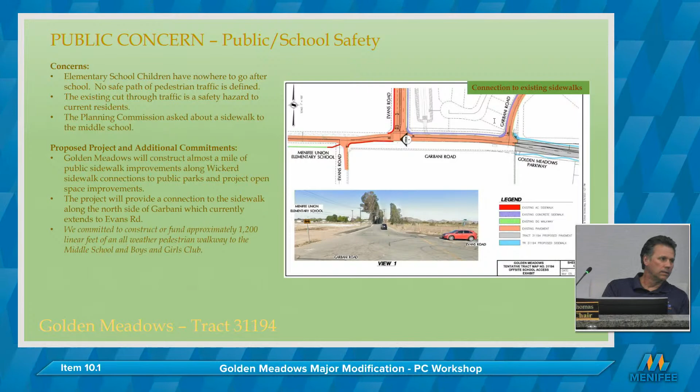We can look into that because it would be a city park. There is a significant cost to replacing, let's say, the basketball hoops with a splash pad. A park of this size, a neighborhood park of 3 acres, we'd want to look at the feasibility and appropriateness of it in that location, or perhaps there's a contribution made to doing a splash pad somewhere else relatively adjacent on a larger public facility, but we can look at that as an option.

When I first suggested it, I thought, I don't know if we want all the cars coming in there to a splash pad, so whatever planning thinks it should be, if they could contribute towards that, that would be a wonderful thing. So those are my questions. What did you say, not a $6 million splash? No, I think it was 4.5 million, but whatever.

Thanks, Chris. Joe, did you have any questions?

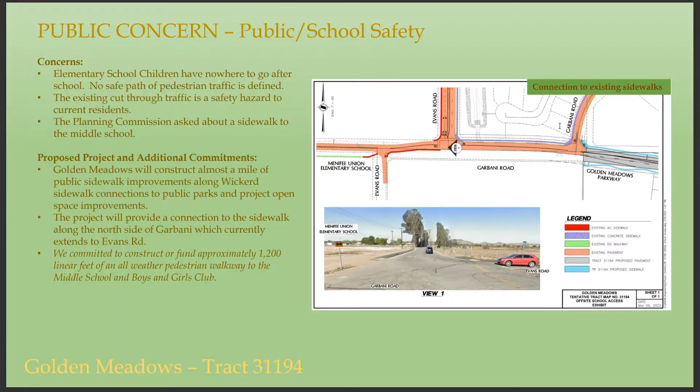So I'm going to have to do this legally. Staff, I'm asking you a question. Do people use that southern Evans from Garbani going down as a thoroughfare to the school?

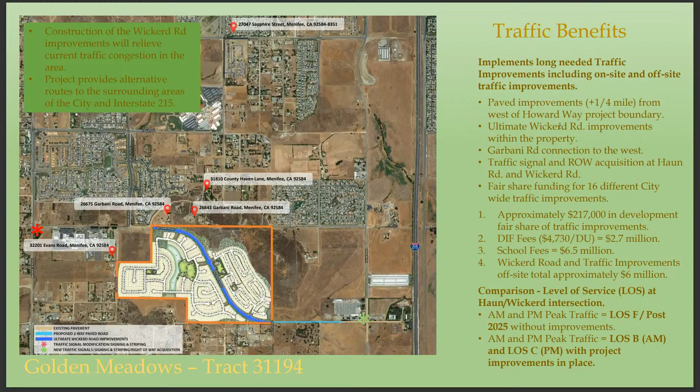Unfortunately, I'm not familiar with that as a school route. I think Ms. So kind of showed a few different alternatives for paths. I do believe that was shown as one of them. It's all dirt south of Garbani.

So let me ask you this then. I weigh both sides of things. With or without the additional units, once Wickerd Road is in, the Evans issue will go away, and the Country Glen issue will go away, will it not? Because now they have an outlet.

You have to find out first where the traffic is coming from. So you have to do a destination study to see where the cars are coming from that are traveling through that. If their ultimate ending destination is at the school and they're coming from a home site further south, and vice versa during pickup and drop off, that would have to take some sort of destination study to determine if that's truly where those vehicles are coming from.

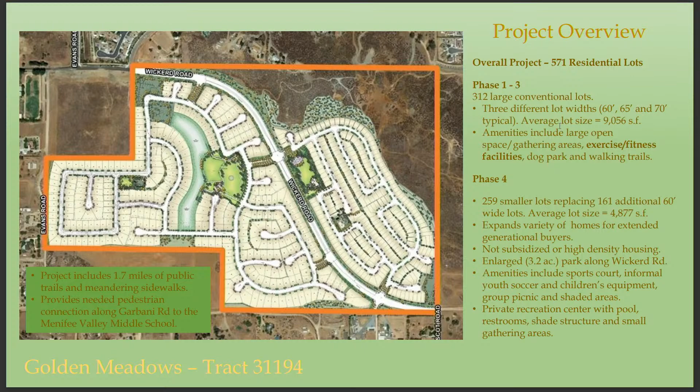So absolutely, Wickerd is going to change the dynamics of traffic patterns within this area. It will relieve some traffic on Haun, similar to the new Holland Road overcrossing. Once that overcrossing gets built, it's going to change Haun. Evans Road has changed recently with the development of Quartz Ranch. So there's a lot of dynamics that are changing within this area, and every new piece of infrastructure, I think the residents even indicated they want to see infrastructure.

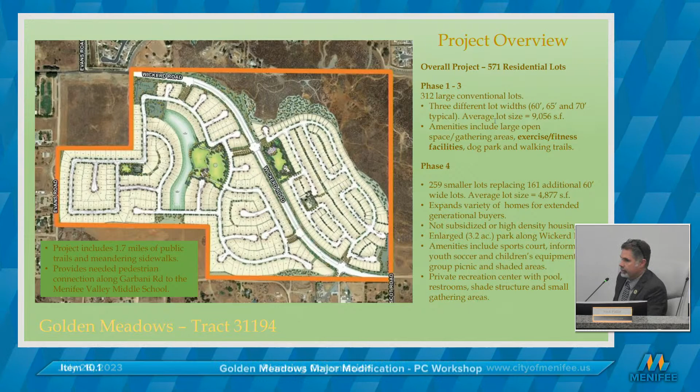So this is how infrastructure gets built. The city only fills in gaps. We don't build long segments of roadways. So last question, is there any CIP improvement plan for Country Haven or Evans Road, these dirt sections? In the foreseeable future? No, at the corner of Evans, there are some discussions with the school district of some improvements along their frontage.

But as you can see there, that Evans Road is offset through Garbani. So there are some challenges with that as well, because if you're looking at the frontage along their parcel, it starts to pull away to the east as it goes north. So it is starting to transition to line up with the intersection of the Evans and Garbani area.

I think I saw a drawing that you would reconfigure that anyway to be continuous from north to south. Yeah, so it ultimately will realign, but that one parcel that is there, it straddles that alignment. So all of Evans north of there, this project is inside that one parcel. So it leaves a kind of a weird remnant piece.

But the short answer is there's no foreseeable CIP future improvement of Country Glen or Evans. They're probably going to—no, Country Haven, that is a private road, so that's a little bit more difficult. Evans is on our circulation element, so that at some point in time could become a project if we work with a developer that's in that area.

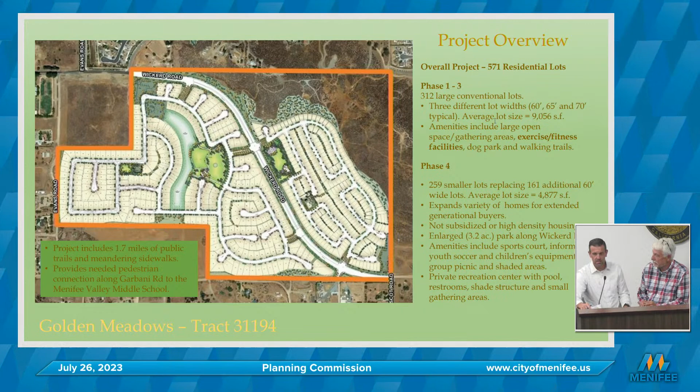Just on that note too, on Evans, our project, one of our conditions too is there's an in lieu fee for our frontage on Evans, because there is that gap there and we don't front on it. It wouldn't make sense to pave it. So there's an in lieu requirement. I think it's around $300,000 of a fee for in lieu payment of the future improvement.

Can I make a clarification to that? That is an option. The condition says that they are required to build it, but if it comes to the city and determination when they're going to build it, it could be an in lieu fee instead of building it, because it might not make sense at the time just to build a little segment of roadway. So, thank you. Yeah, I agree with that.

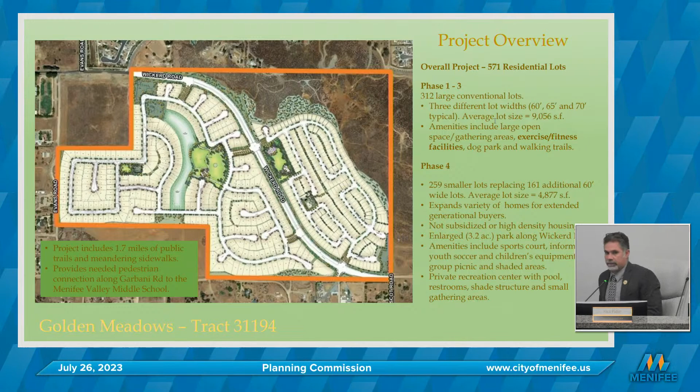I don't want to be out of order, and I don't want to burden the Planning Commission, but I heard some public testimony here tonight about misalignment of the time given, and I would just like to offer up any time. I want to stop presenting and offer time, so if somebody has an idea of what it would take for them to see a benefit to the project, to let them have a chance to speak.

Dave, we're not done with the Country Lane conversation, and I'd want to engage you before we come back to Planning Commission to try to move that further down the road to find something. It's not an easy solution, and there's not even consensus on the people along Country Lane of what they would like, but we're committed to doing that. We don't want to take time tonight away from you to discuss what we're willing to do, but we've put it all out on the table, and I think we're moving closer. I just want to try to work with you between now and when we come back to Planning Commission.

Anybody else who wants to speak about what they'd like to see us do, I want to give them time to do that. I've already heard that you'd like to see nothing, so you don't need to repeat that, or else we'll tag you on the exhibit. But Mr. Galloway, thank you. I appreciate it. I wanted to address that. So, Brian.